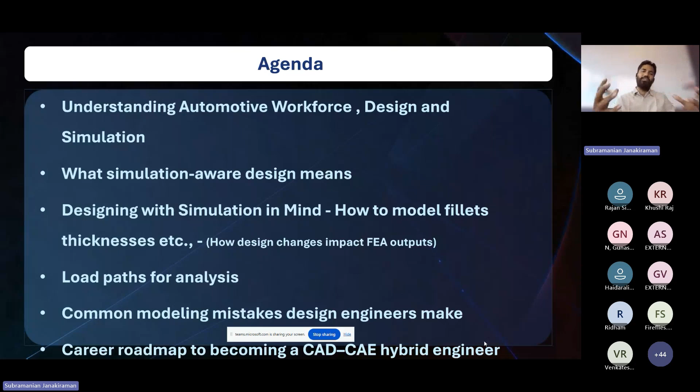And I also have made a small career roadmap for this hybrid kind of engineer. So I strongly believe that if you have only one skill, it would be difficult for you to survive in the industry in the next 5 years. So one should wear multiple hats in the industry to shine or grow themselves in their career, and that is the present need of the hour, right?

So we'll start with the first point. I'm just taking an example. I like telling stories, so I would take it like in a story way, right? Let us consider that there are 3 OEMs in the country. For example, Mahindra, Suzuki, Tata, right?

The basic case study or basic understanding is for every engineer in an OEM, there are 4 engineers working outside an OEM. If Mahindra is recruiting one engineer, there are 4 engineers who are going to work for this engineer. That could be in any capacity. It can either be in design or supplier quality or production, whatever, right? So for one, there are 4 engineers working.

This is a basic understanding we can have. Consider this is not even a lame example. This is the reality of what is happening in the industry, right? For a vehicle to be built, there are 1,000 engineers needed. So, for example, if there are 3 OEMs and each OEM makes 3 cars, we are already talking about 9,000 engineers needed in the OEM only, right?

If for these 9,000 engineers we are talking about around 4 engineers each, we are talking about a demand of almost 45,000 engineers in total involved every year for launching 9 cars a year. But the reality is, globally we are not talking about only 9 models getting launched in a year. We are talking about a huge number of models.

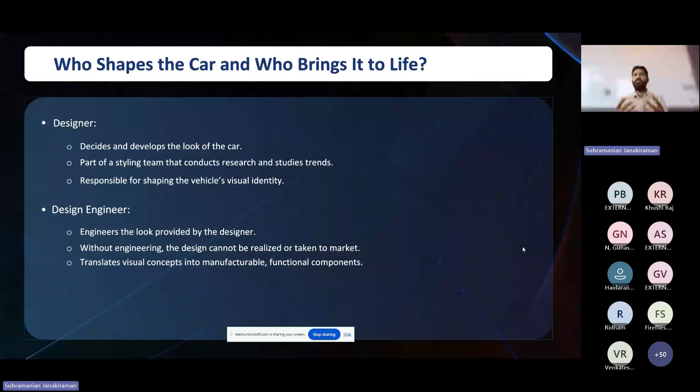And on that note, inside the R&D field, there are multiple types of simulations. The majorly used simulations inside the R&D team or the automotive industry are CAE, CFD, and MBD. What is the primary difference between CAE, CFD, and MBD? CAE is any simulation you do on the component. This is a component. If I do a simulation on the component, it is a CAE simulation. If I do a simulation around the component, it is a CFD simulation.

Now an example. Frontal crash analysis is a CAE simulation. Aerodynamic analysis is a CFD simulation. Multi-body dynamics is steering angle, suspension movement, etc. So majorly we are talking about CAE or CFD types of simulations, which the automotive industry experiences.

Whatever the simulation model, there are three important stages one will follow. This is just for you all. I believe that most of you who have joined this forum are design engineers, so just as an introduction, I would say. Majorly, there are three steps involved, right? Pre-processing, solving, and post-processing. Pre-processing is a stage where you mesh the components.

What is meshing? Meshing is nothing but dividing the 3D model into multiple minute small pieces. Why do you have to do it? For you to really understand where the change of behavior starts from. When it is a whole body, identifying the change of behavior might be difficult. When you divide it into multiple minute small pieces, the area of change of behavior can be easily captured. So it is very important that you do this pre-processing, and this pre-processing is called meshing.

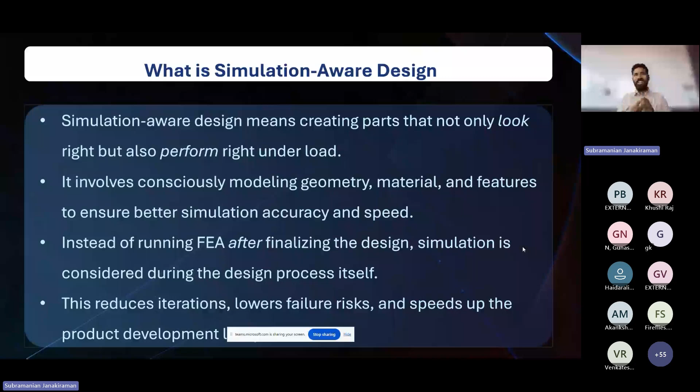And how can one do this, right? When I say features, what can it do? Let us take a very basic bracket, sir, an L bracket. The L bracket is very famous. Anybody can design an L bracket. But what people don't consider is, is it a strong component? Okay, I can definitely design this L bracket. It is just a small sketch, extrude. L bracket is done. I create this datum surface, I create a hole here. Bracket is done. But is it a strong bracket? Will it solve the conditions I have?

When the radiuses are right, when you have additional strength features, see, this is the emboss you can create, or this is a fillet, or this is a rib you can create in between to increase the performance by reducing the stress, right? Just the same L bracket with an improved radius and a rib in between enables better results when it is basically an L bracket.

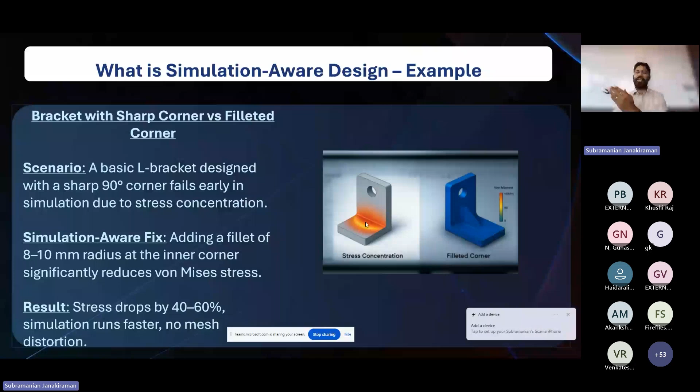Now we are talking about a lot of EV concepts. We are talking about batteries, etc. So let us also talk about a battery tray simulation. If there's a possibility for any of you to go and see, you cannot see random ribs over a battery tray, because the position of this battery tray is a very, very critical position. It might be experiencing certain loads from multiple directions.

In this situation, for example, if there is an engine here, there might be heat dissipation. Okay, on a battery vehicle, why should there be an engine? If there are motors at the wheels which are running and creating heat due to long running time, there is going to be some heat getting transferred over this metal. How is this transfer going to happen?

If there are no ribs at all, the transfer is going to be intense. Do you all agree? When you draw some ribs, these ribs are going to act as a place which will divert the forces or energy. When there is a load acting on this particular area, this rib will enable it in such a way that it will divert the forces to multiple directions.

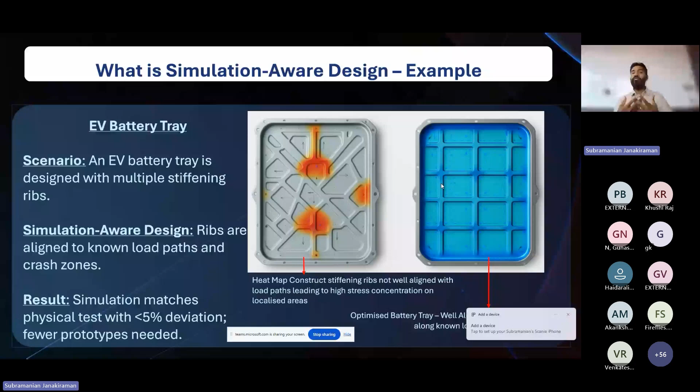So what is a fillet? A fillet enables layers to become smoother, with better transitions. Where can we find fillets? Generally on the corners of the part or over the embosses. What is the criteria for you to have a fillet? There are some thumb rules. At which level will you have a green zone, and at which level a zone which is not right? These thumb rules are defined out of experience.

When you are talking about internal radius, this is the note; if you have a notepad, you can note down these points. Design guidelines, out of experience, say that for plastic components internal radiuses can be 0.5 to 0.75 times the wall thickness. What is wall thickness? Thickness of the parent. In plastic there can be multiple thicknesses, but there should be one wall thickness, the class A thickness. So the internal radius should be minimum between 0.5 to 0.75 of the thickness.

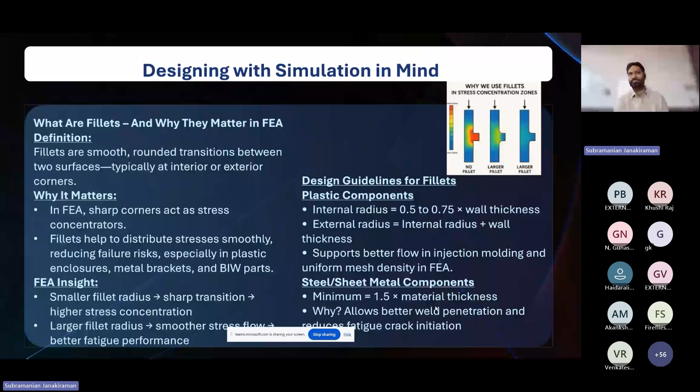Right? And similarly, there are also other examples. Let us take the same L bracket, right? Even without adding ribs, only by increasing the radiuses, we will see that the force acting on that particular area would be better. And again, you should not talk only about the internal radius. You are talking about the corner radiuses also. Here, if you see, the corners are also sharp. So the force tends to travel across.

But when you have a nice shape over it, and that is why, when you look at a particular bracket or at some components in the car, you would see, why is it always in this complex shape? Why cannot it be very simple? Simpler design will have these kind of problems, because we are talking about producibility and longevity of a product. We talked about producibility. How do you produce? For you to properly produce, you will have to consider manufacturing processes. And after you produce, how is the longevity of the product?

When it has these kind of shapes, the loads will get divided properly with proper radiuses. We are only talking about a very basic concept, fillets. And this fillet plays a very, very critical role, sir. Right? And that is the importance of fillet. We could take it that way.

So if you know how to use a proper fillet, say for example, from this slide, if you now memorize at least 0.5 to 0.75 times wall thickness for plastic, 1.5 times material thickness for metals, and implement it on your designs, you are already a hybrid engineer, CAE hybrid engineer, right? Because this is very, very critical for a designer to work on, right? It could be the same material, but a small change in the geometry would give us a fantastic result. Are we making sense?

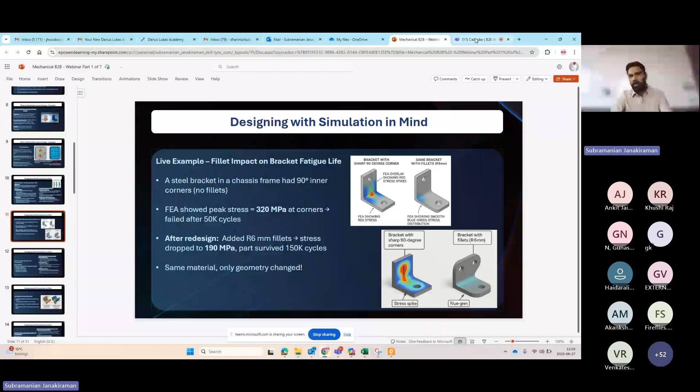Right? If somebody can acknowledge, or Venkatesh, are there any questions until now, or shall I continue? Yeah, you have one question. Shall I read it out? Please do. What are the various new cutting edge tools model-based engineers should focus on in addition to MATLAB and Simulink? Okay. We will cover this topic, sir. We will reach there during the process. So I will get there.

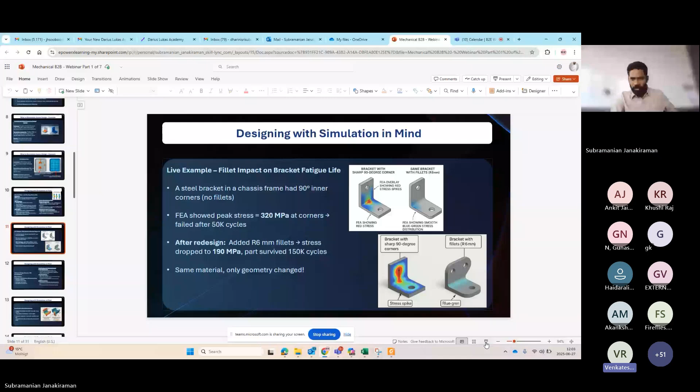Yeah. Subbu, I request, in your screen there is a hide button. Once you press the slideshow, if you can hide it, yeah. Okay. And I hope it is not a problem if I come out of the presentation and look at the questions now and then, right? That will create chaos. Yeah, I'll do that then.

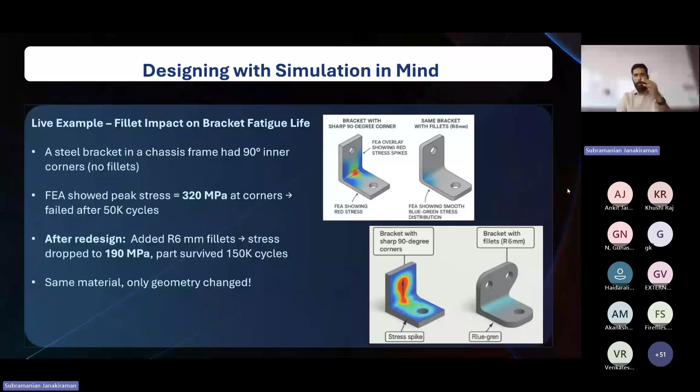So moving forward, now let us talk about thicknesses. Until now we talked about the role of a fillet for you to be an efficient design engineer. Now let us talk about thicknesses of plastic parts and thicknesses of metal parts, right? Why is it very, very important? Why use the right thickness? We talked about wall thickness, right? Plastic generally has multiple thicknesses across the component, but we are talking about the wall thickness here. Why is it really important?

This will increase. We already saw an example about mold flow when the radius is less. We also talked about shrinkage or warping. What is warping? Warping is reduction of thickness at a particular area. Shrinkage is crowding of thickness, crowding of material at a particular area. Structural stiffness: what is structural stiffness?

The previous is a right example. So this is it. Thickness also plays a critical role in these kinds of aspects. So we are again talking about how we are going to give out an efficient product, not a beautiful product. A product is good not only when it is beautiful; it is good only when it is functioning properly, right? So how can these things happen?

One should maintain uniform wall thickness. On this wall thickness, there could be a place where there is a need for changing thickness. Since it is plastic, since it is molded, it is very easy for us to design with multiple or various wall thicknesses. But the advice is to not use those things, because it would tempt us as design engineers to increase the wall thickness in a particular area to avoid certain features like ribs or embosses. But it is always advised to have uniform wall thickness.

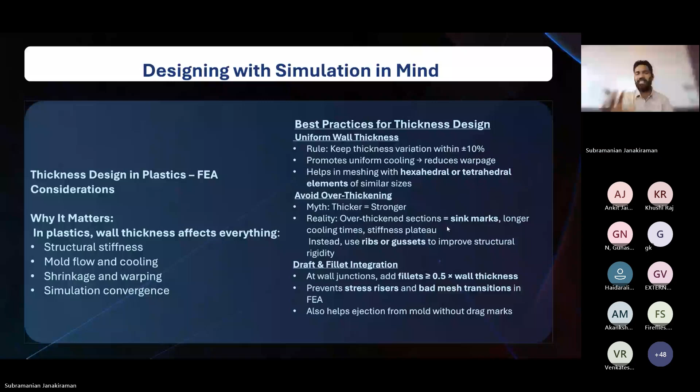Right? This validation person, the time or energy or money what we spend here, if you have these particular skills, this time, money, and energy would reduce a lot, and which is what the industry is wanting today. Right? Moving forward. For example, this is a plastic gear housing.

Okay, how will the load act or stress behave when you have multiple thicknesses? How will the mold flow be when the part is such a complex part? Right? Now, the left side part can look like a simple part, but what is the problem here? The thicknesses are varying. It has sharp wall corners. So the flow would be very, very less. What is here? Here we have uniform thickness, and the remaining strength we are gaining by these ribs and fillets. So the mold flow is also nice.

I mean, how does this part behave, etc., and then you add ribs, features for increasing strength, for increasing mold flowability, for increasing the production possibility. You increase radius, and then you do all these things. When you reach here, everything will be green. So you can continue production of the part. But if you already know these kind of constraints, you can reduce a lot of iterations in between. That is the thought process. Right? This is how a design engineer should think. This is an example for a plastic gear.

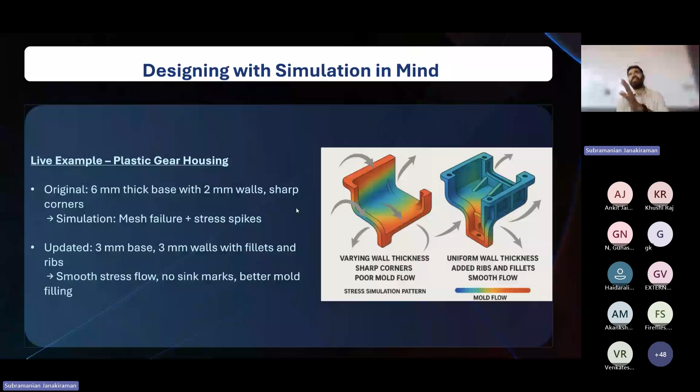Similarly, let us go to sheet metal now. Sheet metal, how does thickness play a role on a sheet metal component? Right? Let us consider BIW parts. I am a fan of BIW parts. So let us consider BIW parts. Casting and forging could be at least a little related to plastic molding processes. We will follow the same pattern. Why does thickness play a critical role in sheet metal?

Because it is very, very important for crashworthiness, NVH, type of the shapes, and the vehicle weight. Okay, these 4 words, as words, look very, very simple. But how does it reflect? Like I initially told, a design engineer should design considering manufacturability, assembly, and very importantly, functionality.

So functionality, it is very easy. When we talk about a door, what is the functionality of a door? People would easily say opening and closing. The opening angle would be more. Window should go up and down. But people sometimes tend to forget the side impact's effect. Similarly, on the hood, people talk about open and close, aerodynamic structure, etc. But people tend to forget the frontal crash, or don't know how to implement the frontal crash's influence on it.

Today, after the session, if you can go and open a car's bonnet, a car's hood, you would see a lot of structures on the inner panel. Most probably Y or an emboss or a honeycomb structure. The reason for those structures is this crashworthiness.

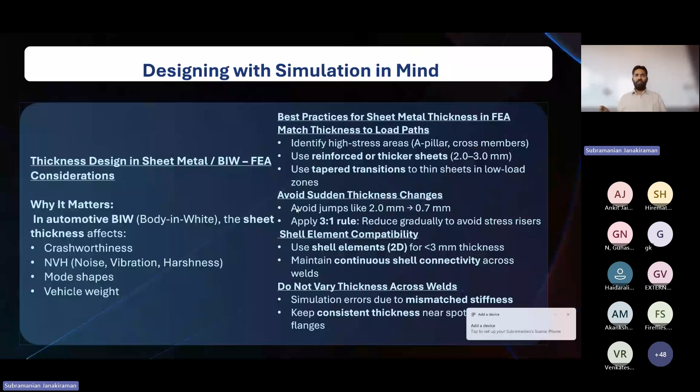Example, right? This is a side impact zone. It is very common to have a sudden jump from 2 millimeters to 0.7 millimeters of reduction. It could be a stronger material and slowly it reduces, but the crash output would be very, very hard during the spot weld area. But when you are slowly reducing the thickness from 2 to 1.5, to 1.5 to 1, then you will have better performance. Right? Moving forward.

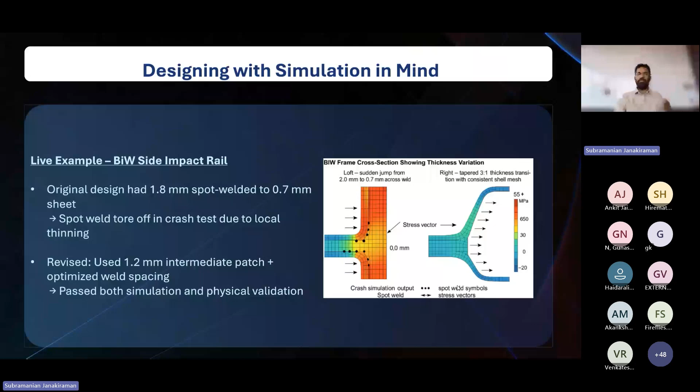And that is why during a collision, people tend to jump because of the load. Right? Even though you are on a flat road, not even on a bumpy road, when you hit, you jump because of the load and the force. And also the vehicle wobbles. Similarly, you will have multiple loads from multiple directions coming in. How can you have a proper load path? What are good things one should do to ensure a proper load path?

So during this collision, the load goes outside the car and not inside the passenger cabin. The intention here is the load getting inside the passenger cabin should be very, very less when compared to the load going outside the passenger cabin. Right? That should be the thought process. So during this motion, it should either go out or sideways. So how will I create my embosses, or how will I do these things? Do all this load information efficiently during the design process. How will this impact the performance of the vehicle? Because ultimately we are talking about performance of the vehicle.

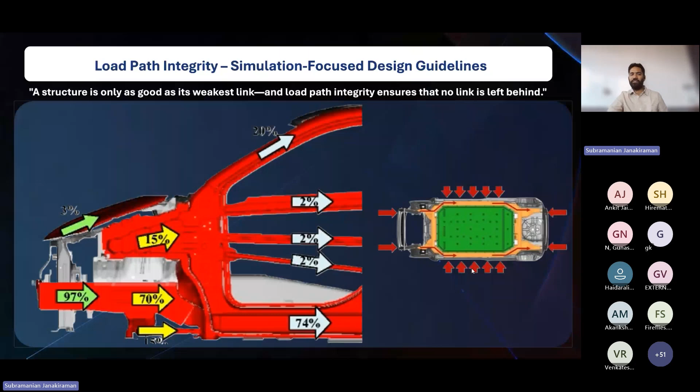For this, there are certain aspects which one should follow, and that again is basic: blended transitions and properly using radiuses and fillets. It would be surprising for a design engineer to know that if you use proper radiuses, proper thicknesses, proper fillets, your design would pass in the first or second iteration. The first iteration would definitely not pass because requirements would change. Second iteration. Then you become a very efficient design engineer.

When I say don't overcomplicate the geometry, it means you should not have complex structures wherever your components are exposed. There should not be very critical structures in those places. Why? That would cause a lot of meshing problems, which would lead to wrong results, results not relative to reality. A smoother and a normal design would be very helpful to reduce the stress on the particular area during the crash simulations.

Right? Similarly, what could be the best practice? Whichever is the load carrying area, keep that part very simple and clean. What is very simple and clean? No critical structures or critical shapes on it. Right? Whenever you're talking about these particular areas, don't even think of having aesthetic items. So generally, when you see vehicles, it is very easy to mention Suzuki in the center, right? But they always mention it on the corners. It is very easy to mention Safari in the center, but they used to mention the name of the car on the sides only.

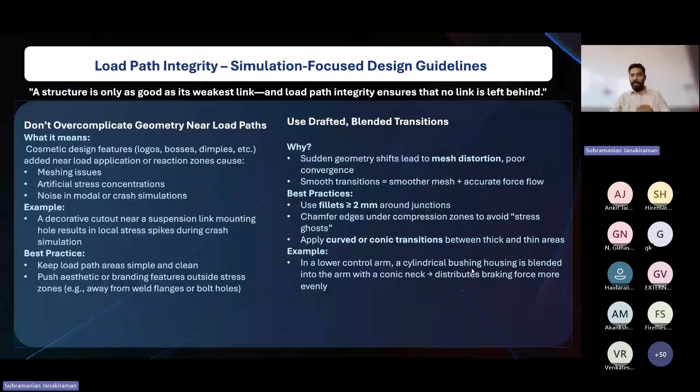Right? Similarly, one should also have proper connectivity from one part to another part. When I say connectivity, we are not talking only about spot welding, nuts or welds. I'm talking about the individual part.

Right? So if there are very minor gaps between the surfaces, or if it is a small part which has to be attached to a bigger component, always try thinking in such a way that you join these two pieces together, rather than welding or nut bolting or using screws, bolts, etc.

Right? It is very nice for you to use Boolean operations like merge or join. I had prepared this particular surface. When I join, you only give a radius, and it becomes a single face. During the design process, from the production process, we are talking about failures, zero-stiffness zones. From the design process, how can I use this Boolean methodology to achieve that particular activity?

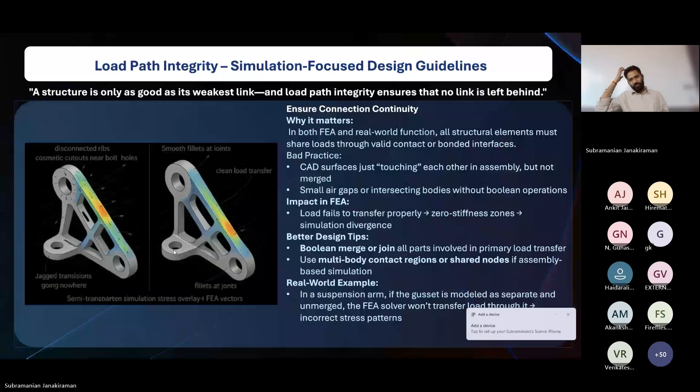Right? One can have multi-body contact regions instead of one particular area, and that is why if you see across the vehicle, you see multiple points having spot welds. It may be sufficient even if you have one or two, but they don't want to reduce those spot welds because they are ensuring the performance of the vehicle. Right? So that is what is important.

And again, what is very important is one should avoid load concentrating geometry. What can be a load concentrating geometry? Right? These kinds of sharp corners are load concentrating geometry. These kinds of smaller radii are load concentrating geometry. Right? One should not design to increase stress on a particular area.

Adding ribs is also very nice, but if you add the rib in the corner of the part, that will create a different type of load structure. But if this rib is towards the center of the component, it enables proper strength. Right? So these ribs should be positioned in such a way that they intersect properly and they merge into the load bearing surfaces properly.

Right? So what are these load bearing features? Like I previously mentioned, if it is thick, it doesn't mean that it is a strong part. Right? The load generally follows the geometry and not the thickness. So if you're adding some material to a particular area, the load is getting distributed there, right?

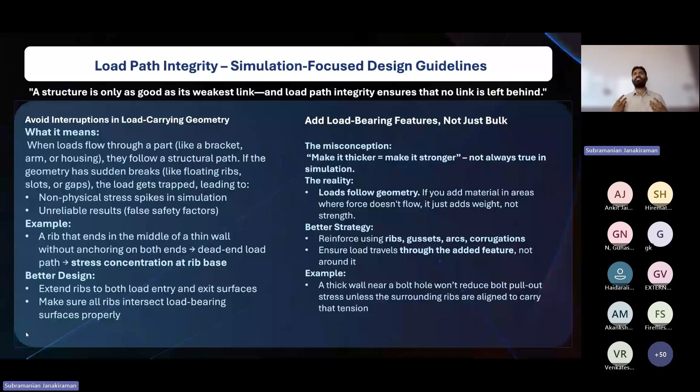A basic example, like what I have mentioned here, is a thick wall near a bolt hole would not reduce the bolt pull-out stress unless you have the surrounding ribs, because these are the ribs which carry the tension instead of just having bolt holes, right? And that is why this load path is very, very critical information.

And if you see the differences here, there are multiple shapes which are not at all needed, which are not at all the intent. And this is only creating stress here. Here, the thickness is very much varying. The ribs are not flowing together. And now, when you make optimum changes, you see a very smooth flow of transition, right? Ribs not fully getting connected are a bigger problem, which one should not afford. And this area is totally avoided. And this is what one should think about.

Of course, here you are talking about material addition, or you can also think about material deletion, and this depends upon the performance of it. So as a summary, and that is why I had this statement across all the slides about this load topic: the structure is only as good as its weakest link, and load path integrity ensures that no link is left behind.

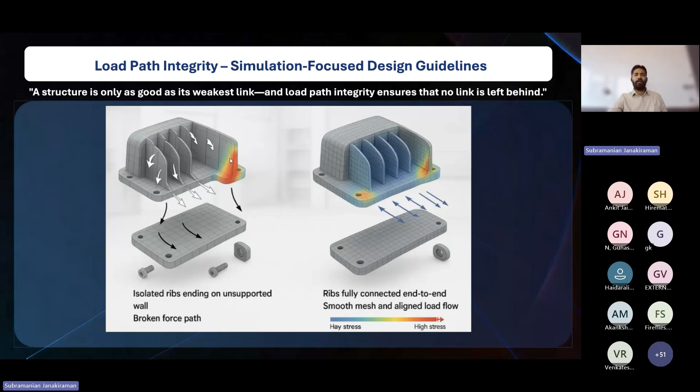So what is load path integrity? You should not have any link left behind. That should be your thought process from the beginning when you are designing a component. This is a left behind design. This is a non-left behind design. Right? There should not be an extra protrusion kind of thing on a design. Right? This is the thought process.

And before getting into this common modeling, I'll just see if there are any questions for me. No questions. The minimum bend radius for sheet metal is 1T, right? I saw 1.5T. Okay, 1.5T is the optimum value. 1T is the minimum. So we thought about red, blue, green. 1T is where blue starts and 1.5T is where it goes to green. 1T is not a mistake, but 0.5T is a mistake. 0.8T, 0.9T is a mistake.

Stress risers are, okay, let us consider a T bracket. If this area doesn't have a radius at all or has a very small radius, that area is a stress riser. Where should a new cutting edge tool model based engineer focus? Yeah, we will see that, sir. I have a different perspective on tools altogether. Okay, anyway, I'll address that and then go back.

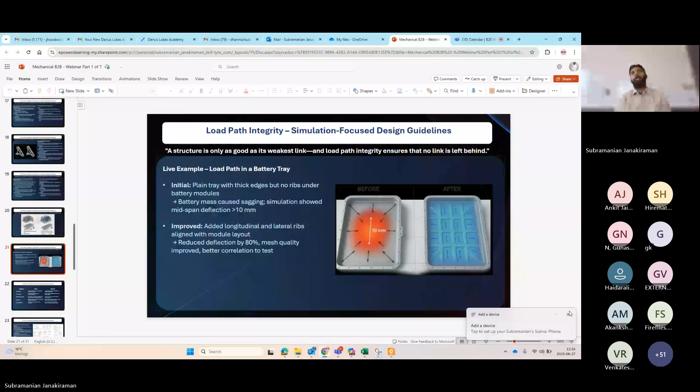Today, MATLAB is a nice thing. OpenFOAM is an emerging market. Python, of course, you will have to know to do any of these things. Apart from these things, I have one particular perspective when we talk about designing tools, and simulation tools also, like HyperMesh or ANSYS. I have a kind of a perception, sir. Am I taking a lot of time? No, yeah. I have a type of perception.

See, it is not important that you know multiple tools, but it is very important that you know one tool properly. One tool really well. What is properly? What is really well here? Let us take an example. If I have to make this tray in CATIA, what will I do? Datum plane, sketch, extrude, get this component. NX: datum plane, sketch, extrude, features. Creo: datum plane, sketch. So whatever you do, the generic approach is going to be the same. Only the tool interface is different.

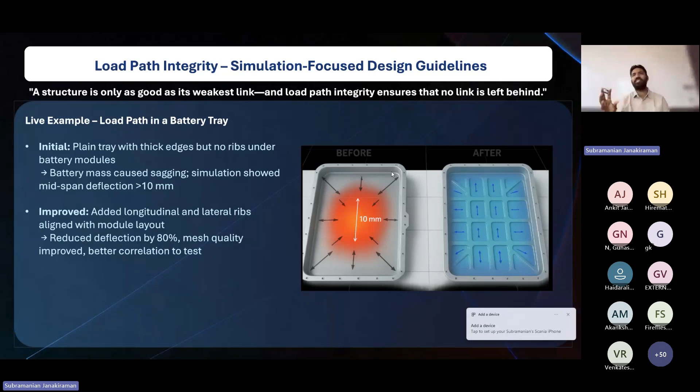So it is not important to know multiple tools, but it is important that you understand the engineering behind the component. You should have this generic approach. What steps should I follow to do this efficiently? That is what is very, very important. Right? Now, continuing the presentation, what could be common mistakes a design engineer generally makes? We are actually nearing the end of the presentation. I also have some examples here of what one should not do, right?

A geometry should not have any breaks or discontinuities. It should be continuous and it should have this flow. Whenever there is a flow, the transition should be gradual. It should not have abrupt thicknesses or sudden changes. Right? When you are trying to use reinforcements, those reinforcements should have ribs or bosses, so the load change direction is proper. If you don't use this, the load exit regions will be open, which is not ideal.

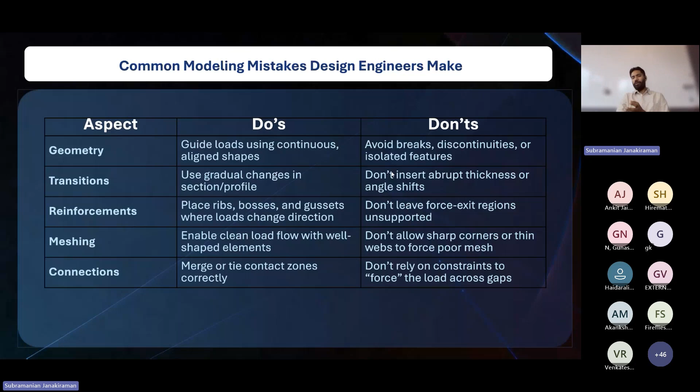And we see a lot of these problems. This image talks about what is right, what is not right, what could be better, what could have been avoided. We talked a lot about warping. What is warping? Material getting accumulated. How can gussets minimize the warping? When I add these things, these kinds of warpings will be avoided. Similarly, this is a poor design. This is a good design. This also is a good design. Right? And similarly, when you have sink marks, how does it work? When you have no sink mark, what is good for you?

Without sink marks is what is good for us, right? And how can the connections work? How do you avoid these kinds of sink marks? What is uniform? What is not uniform? Right? So don't use small holes on the critical load-bearing area. Don't use your aesthetic things, right?

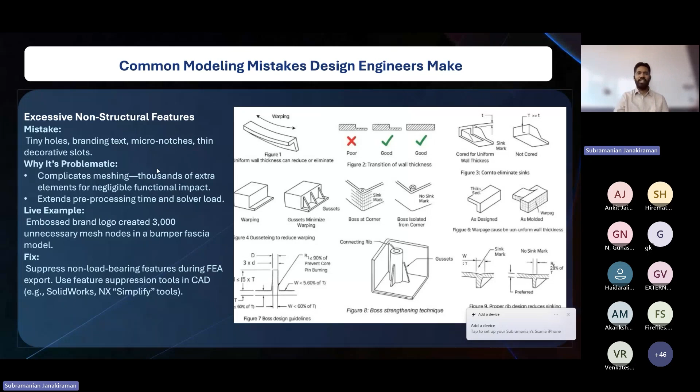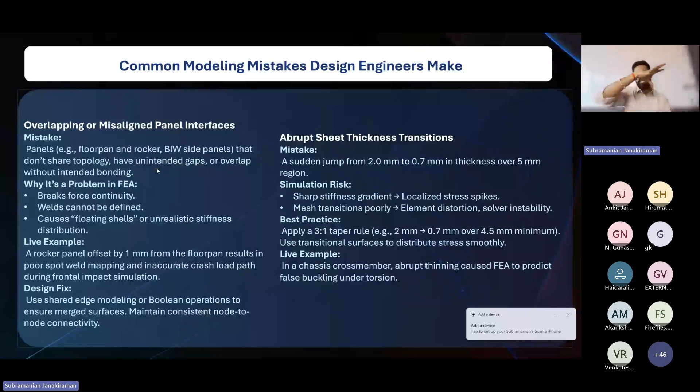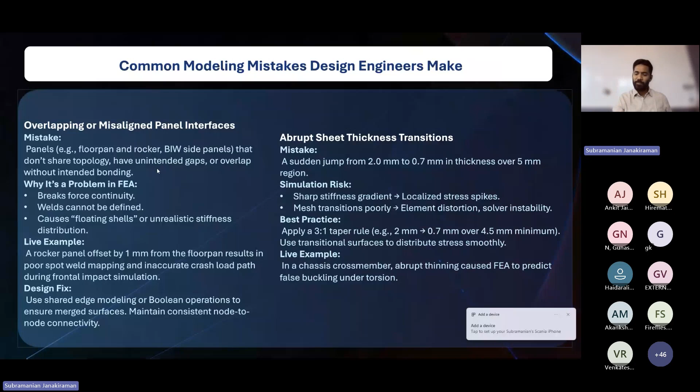One should not cause these floating shells or stiffness on different areas, stress loads on different areas, right? When you don't choose the right thickness of the material, you may experience these kinds of aspects. And also don't jump from bigger thickness to smaller thickness drastically, move gradually, right? These are the key points which I've been telling throughout the presentation, because this is very important for you to exhibit yourself as a simulation engineer, right?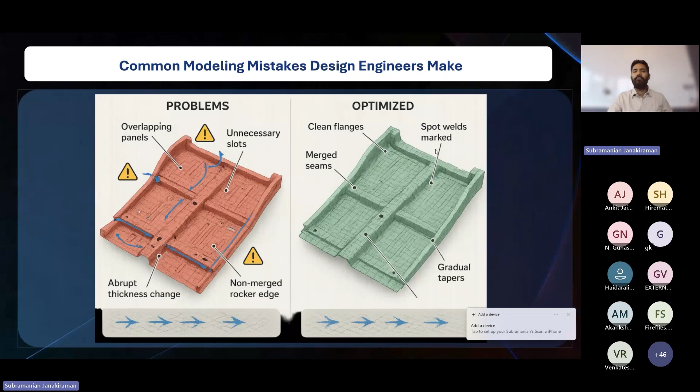Right? So what other problems an engineer could make is reducing the number of welds or joining elements. Don't do that. If it demands 10 spot welds, go for 10 spot welds. And between one spot weld and another, the minimum is 12-13 millimeters. Okay, 10 millimeters. The reason is that the spot gun diameter is 10 millimeters. You should have that flatness on that particular area for the gun to get placed. If you don't have that flatness, you will not have effective welding. Not effective welding is not effective functionality. Ultimately, it goes back to the functionality again.

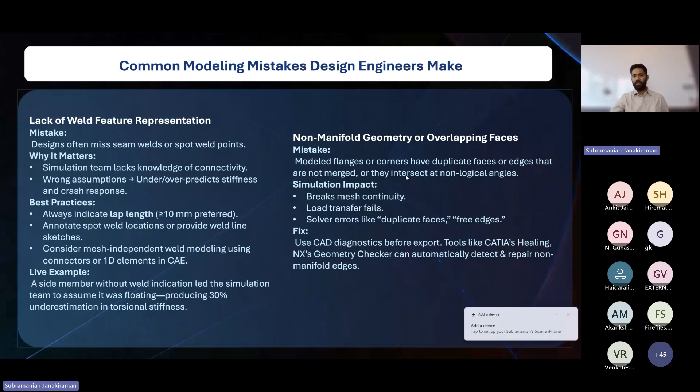Right? And similarly, non-manifold geometry or overlapping faces. What could be a probable mistake? What we generally do, the flanges or the corners have duplicate faces. You should not have sharp edges and sharp corners. You should have curved corners. There should be some logical angles. Why is this 7 degrees? Why is this 4 degrees? Right? So these are all the aspects one should have in mind.

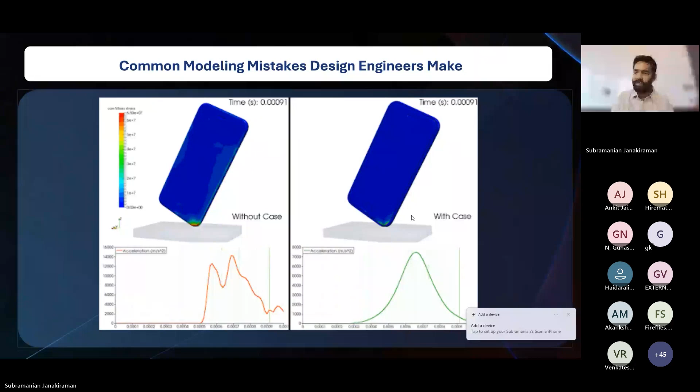Without the case, the corner is going to be a little sharper, so the impact is more. With the case, the corner is a little wider, so the impact is less. That is my thought process, and all this time I was talking about radius and corners. This example will solve that point. Radius is smaller, impact is more. Radius is bigger, impact is less. Does it make sense?

Right? Before going to the next stage, do I have some questions? No.

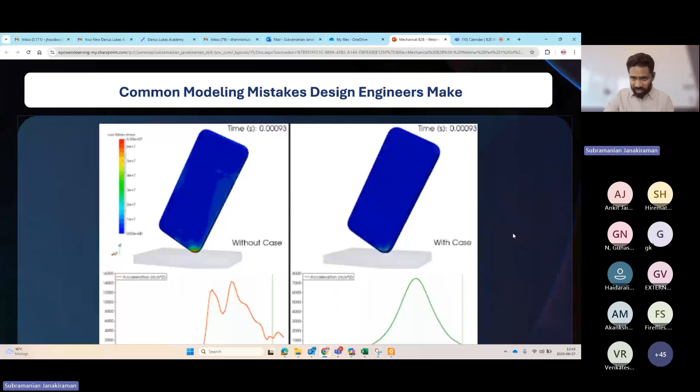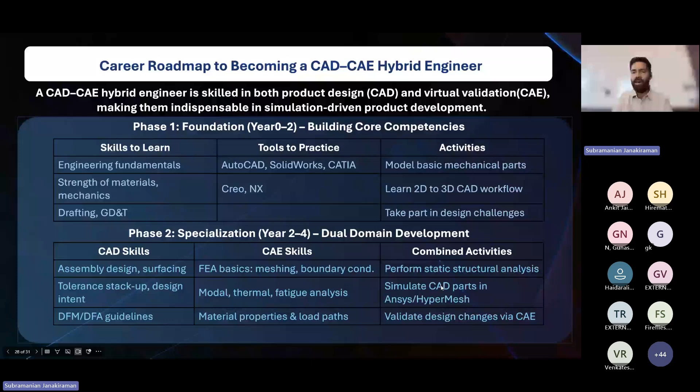So you have designed a component, you understand these things, perform a static analysis for it. You have this stack-up analysis, simulate a complete assembly and understand how it works. It can either be in ANSYS or any other tool. Validate design changes via the CAE program. Another phase is industry readiness. This is where you become ready.

If you have 4+ years of experience, it is needed that you have the skill. Design for simulation, which is load paths, fillets. FEA result interpretation and optimization, you must have. You should communicate CAD and CAE iterations correctly. Example, suspension arm or whatever. Improve the plastic housing for stress or warpage.

These are basic examples. Forget about the examples. These are the must-have abilities the industry is expecting today. Right? Having the right skills, you can expect these kinds of career roles. Right?

This is just a tip from my side: work on at least 5 end-to-end design validations. What is end-to-end? You should design, you should also validate. When you validate, you will have some problem, you should redesign. Contribute to some open source projects or university competitions like Baja, FSAE, right? Get certified on certain tools. Python or MATLAB, very, very important for parametric optimization.